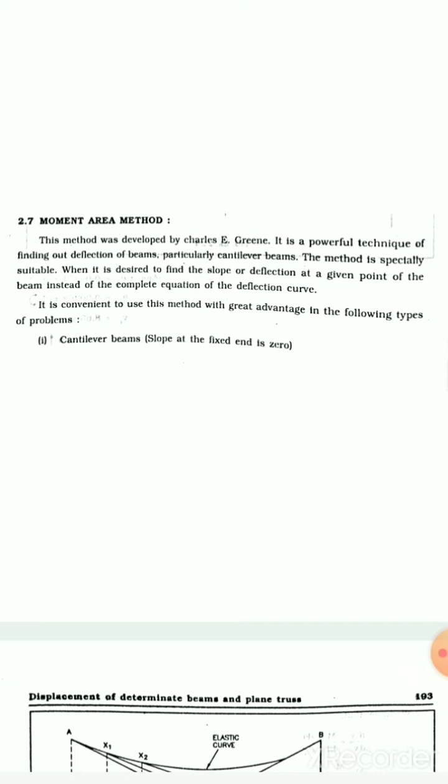Hello everyone. In our Structural Analysis 1 course, today we are going to see our next important topic: the moment area method. In a previous video, we saw Macaulay's method.

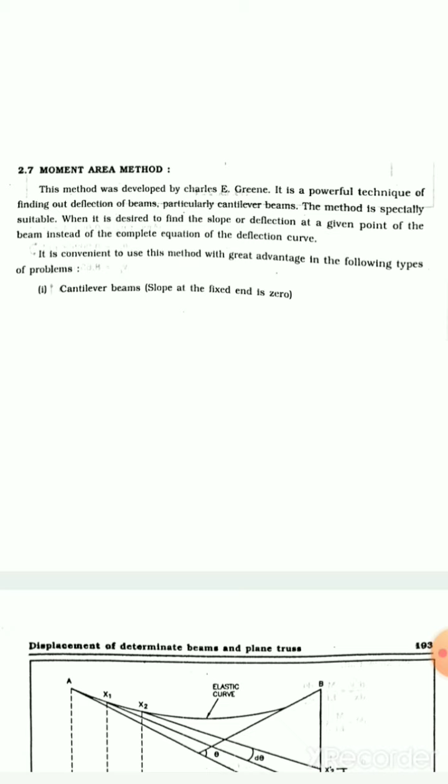First of all, what is a cantilever beam? One end fixed and another is free - it is called a cantilever beam.

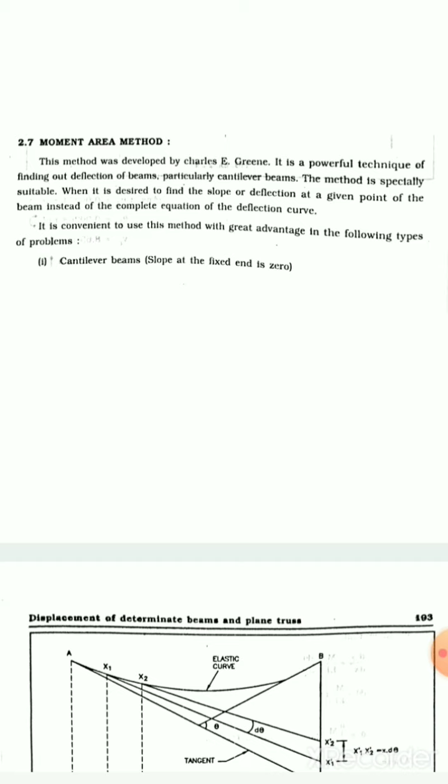The method is specially suitable when it is desired to find the slope or deflection at a given point of the beam, instead of a complete equation of the deflection curve.

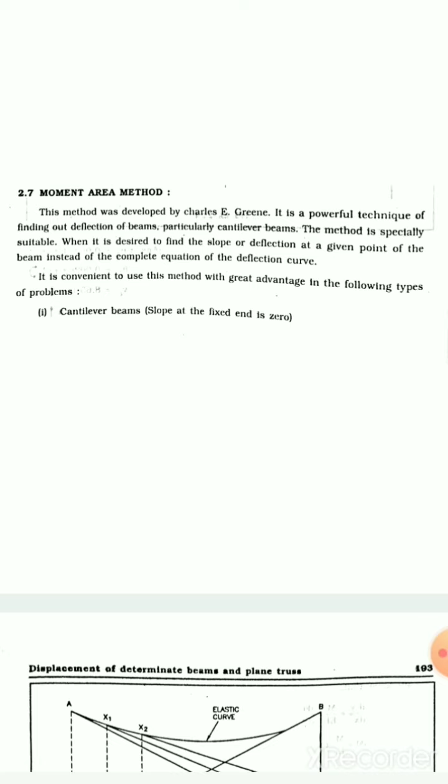So it is convenient to use this method with a great advantage in the following types of problems. Why is this method useful, what is its advantage?

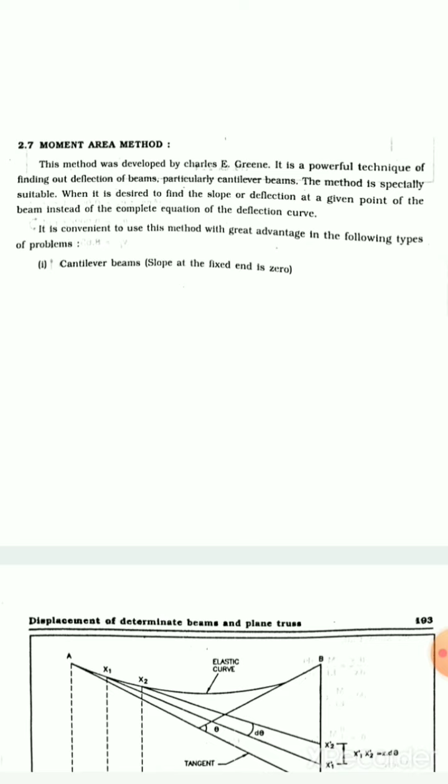The first case: for a cantilever beam, slope at the fixed end is 0.

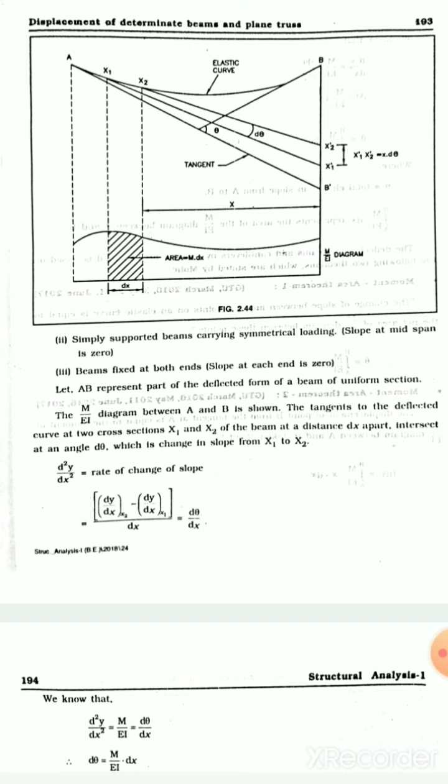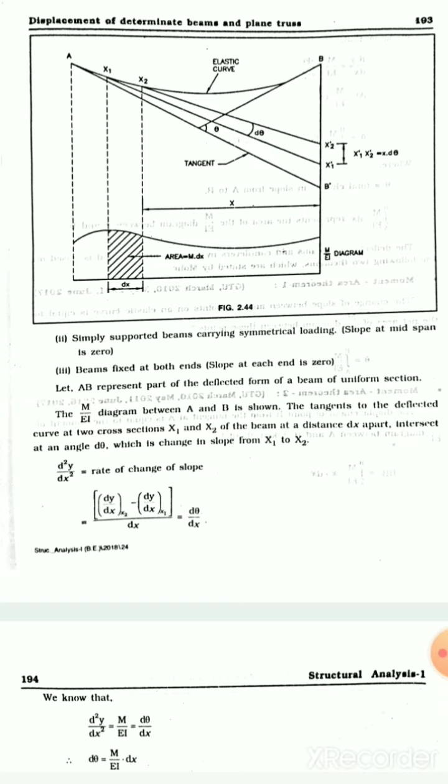The M by EI diagram between A and B is shown.

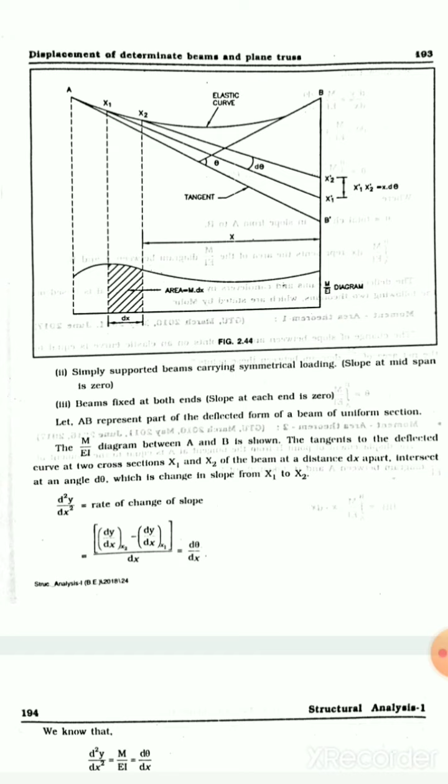The tangent to the deflected curve at two cross sections x1 and x2 of the beam, at a distance dx apart, intersect at an angle d-theta, which is the change in slope from x1 to x2. The tangent forms at the deflected curve. At the deflected part, two cross sections are generated, x1 and x2, of the beam at distance dx apart, intersecting at angle d-theta - this is the change in slope from x1 to x2.

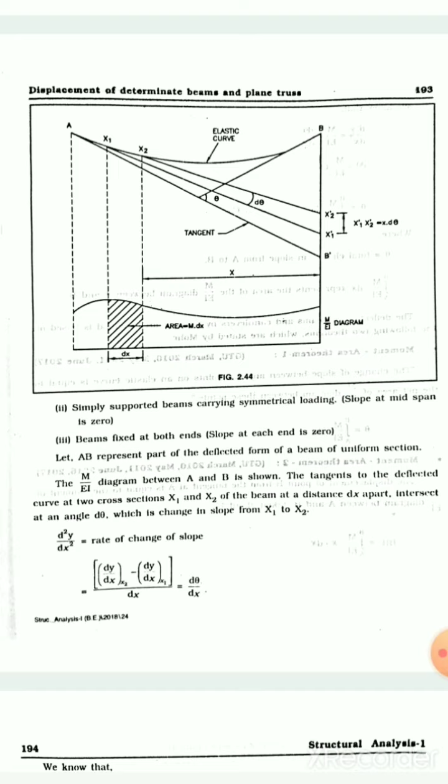So d-square y by dx-square is equal to the rate of change of slope: dy/dx at x2 minus dy/dx at x1, upon dx, is equal to d-theta by dx.

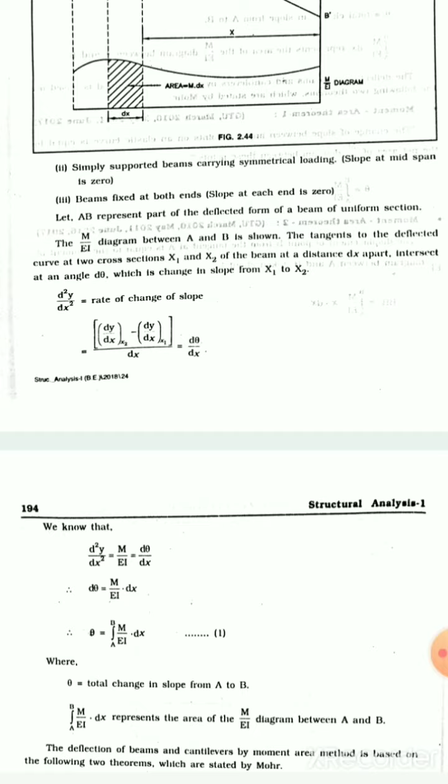So we know that d-square y by dx-square equals M by EI equals d-theta by dx. So d-theta becomes M by EI into dx.

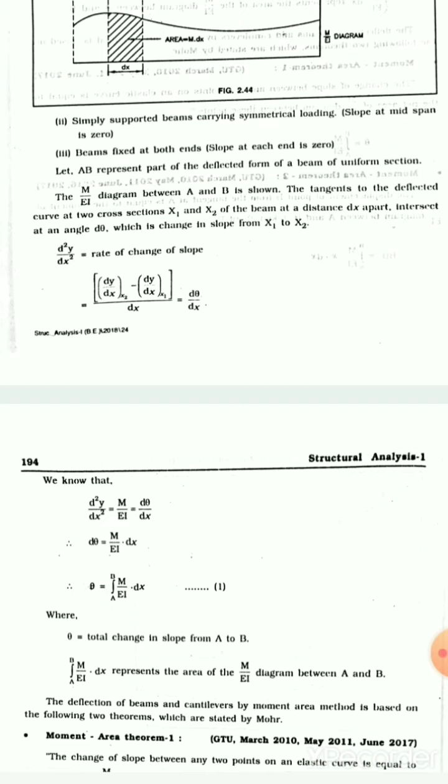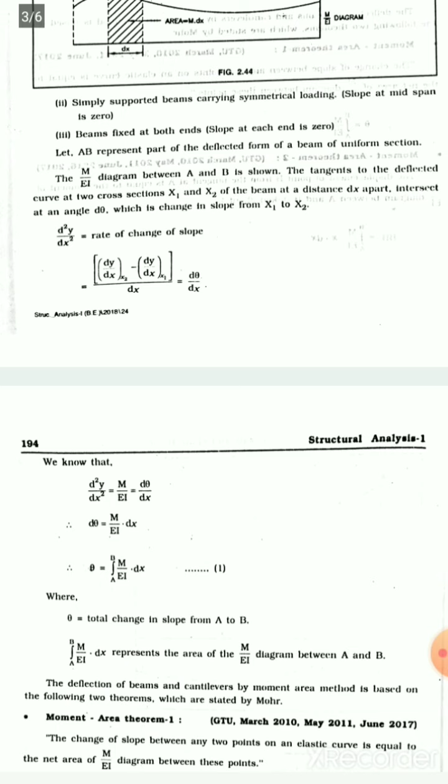Integrating it, theta becomes the integration from A to B of M upon EI into dx, where theta is equal to the total change in slope from A to B. The integration from A to B of M upon EI dx represents the area of the M upon EI diagram between A and B.

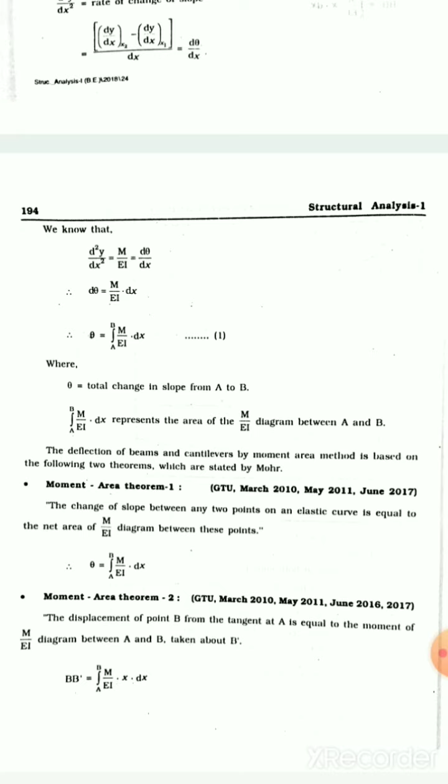So the deflection of beams and cantilevers by the moment area method is based on the following two theorems, which are stated by Mohr.

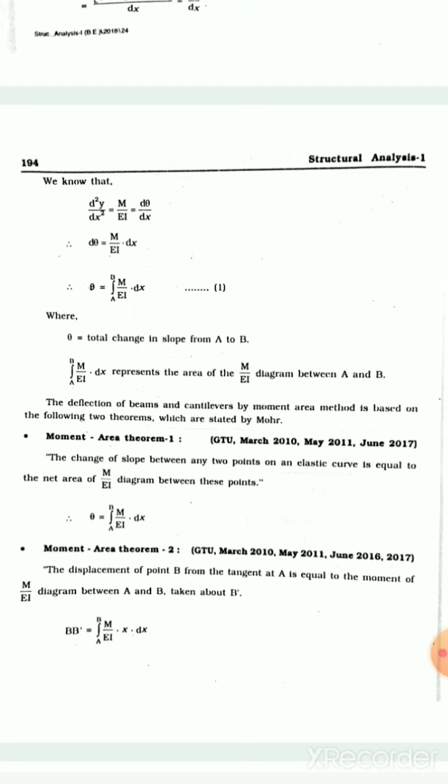Moment area theorem: the change of slope between two points on an elastic curve is equal to the net area of the M/EI diagram between these points. So theta equals integration from a to b of M/EI into dx.

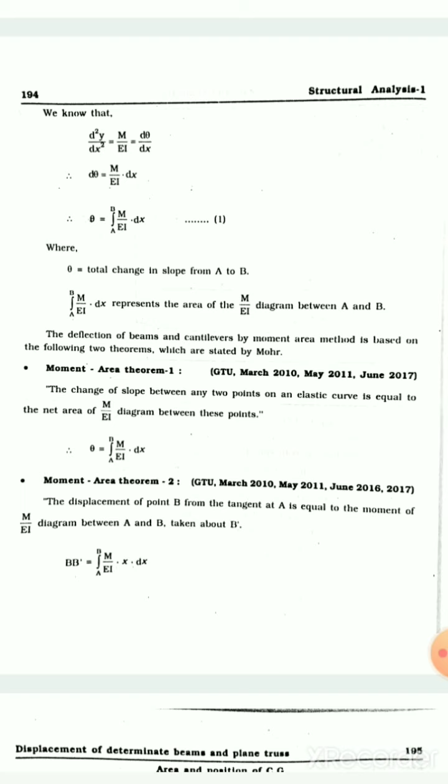Moment area theorem second: the displacement of point B from the tangent at A is equal to the moment of the M/EI diagram between A and B taken about B dash. So BB dash equals integration from a to b of M/EI into x into dx.

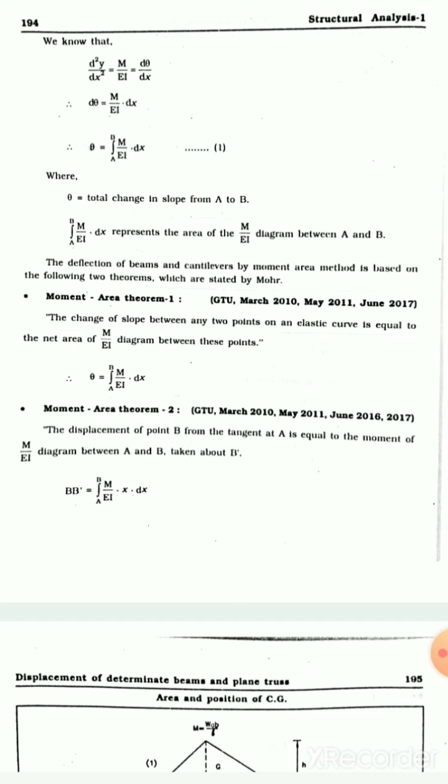Now area and position of center of gravity. Here a triangle is given, so area equals 1/2 L into H. CG is located at a distance of L plus A by 3 and L plus B by 3.

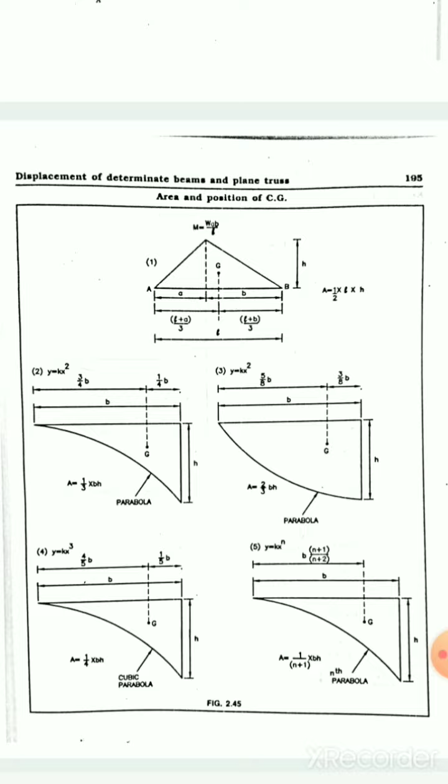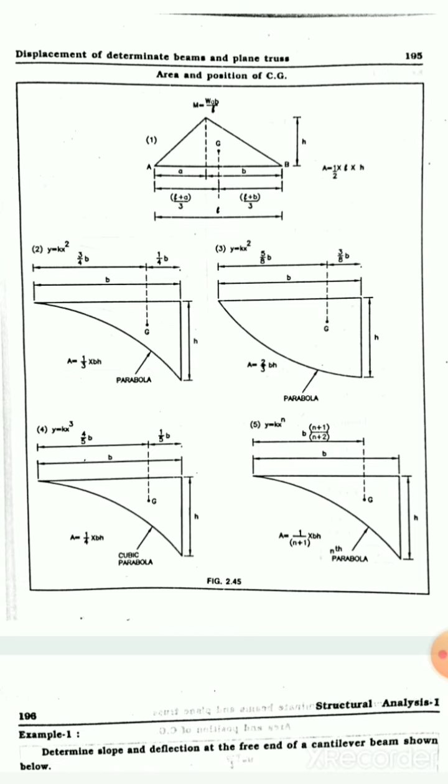Total distance is L. For a parabola, area is 1/3 B into H. For the second figure, it is 2/3 B into H. Then for a cubic parabola, area equals 1/4 BH, and the CG is located at a distance of 4/5 B.

For an nth degree parabola, area equals 1/(n+1) into BH. It is called the nth parabola.

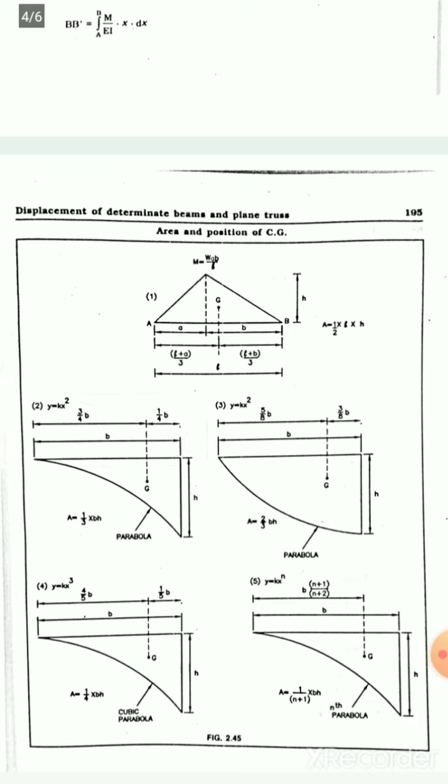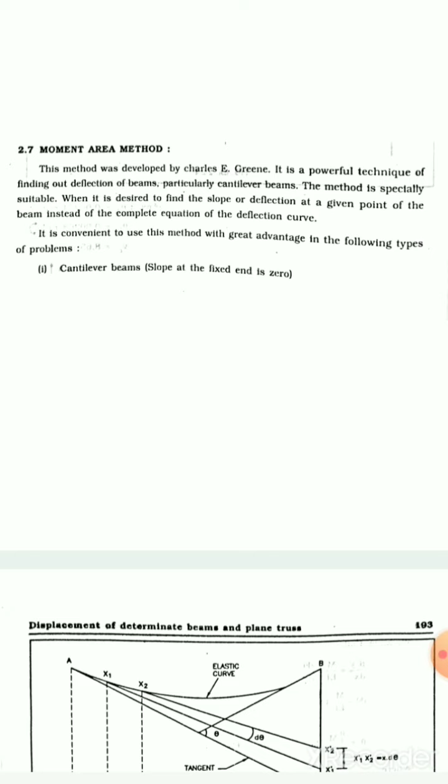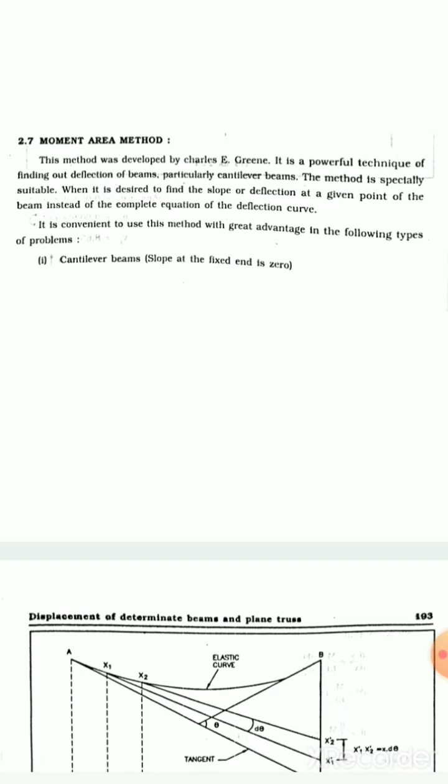This is one of the most important theories, the moment area method. This method was developed by Charles E. Greene. It is a powerful technique of finding out deflection of beams, particularly cantilever beams. The method is especially suitable when it is desired to find the slope or deflection at a given point of the beam, instead of the complete equation of the deflection curve.

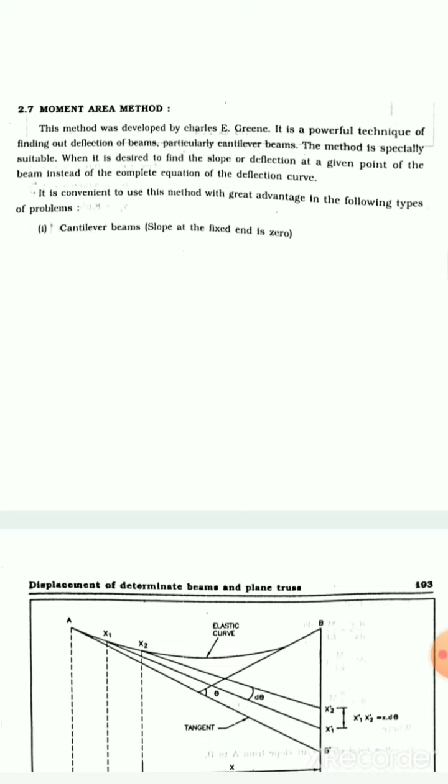It is convenient to use this method with great advantage in the following types of problems: cantilever beams, where the slope at the fixed end is 0.

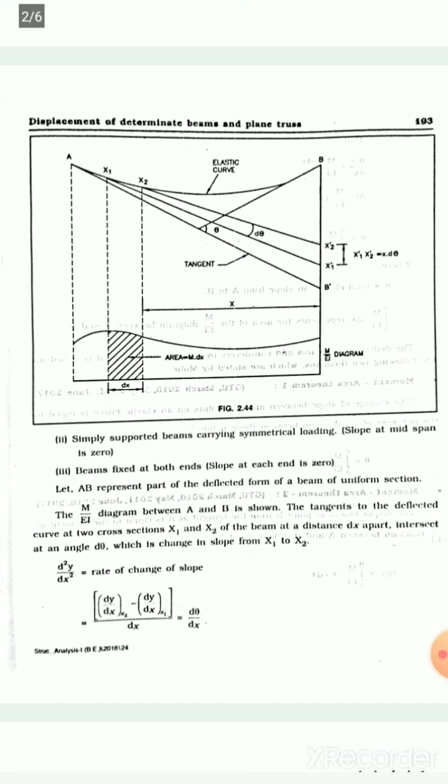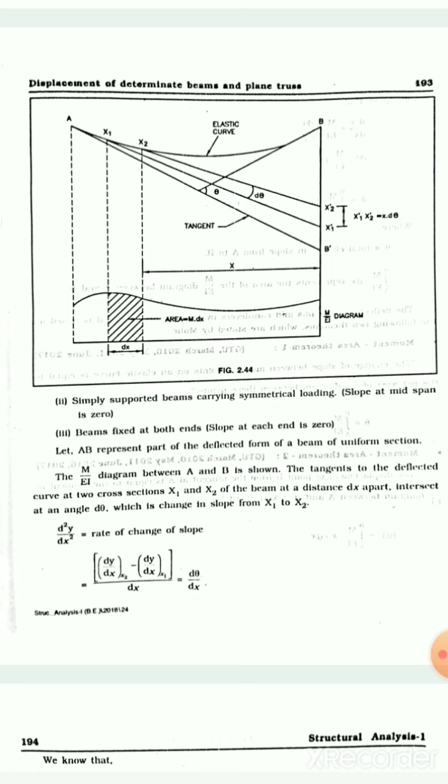Simply supported beam carrying symmetrical loading: the slope at midspan is 0.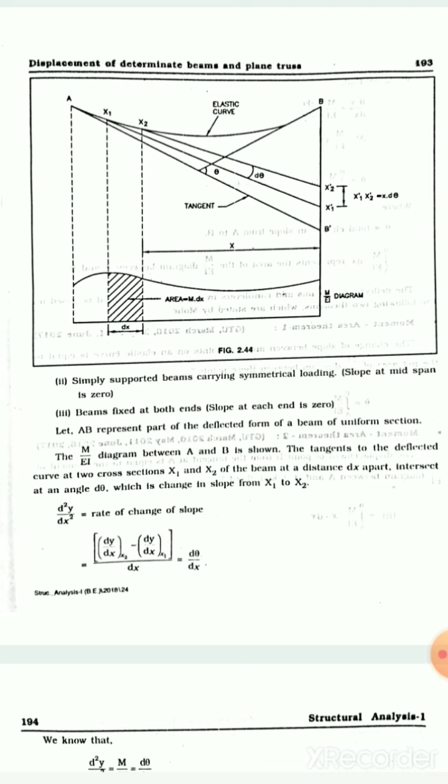Beams fixed at both ends: the slope at each end is 0. So theta equals integration from a to b of M/EI into dx.

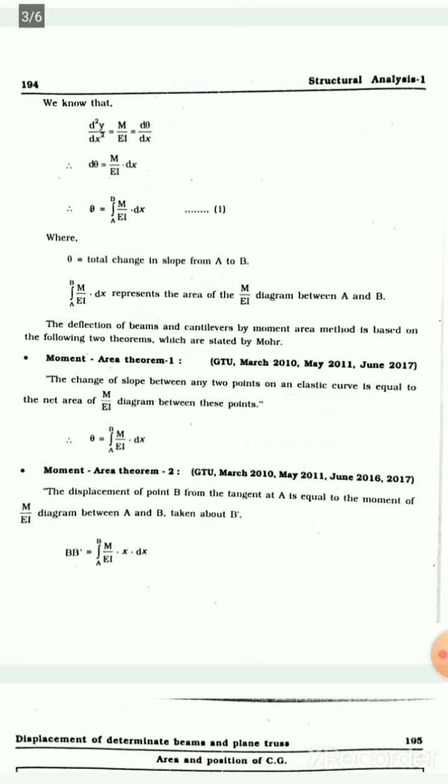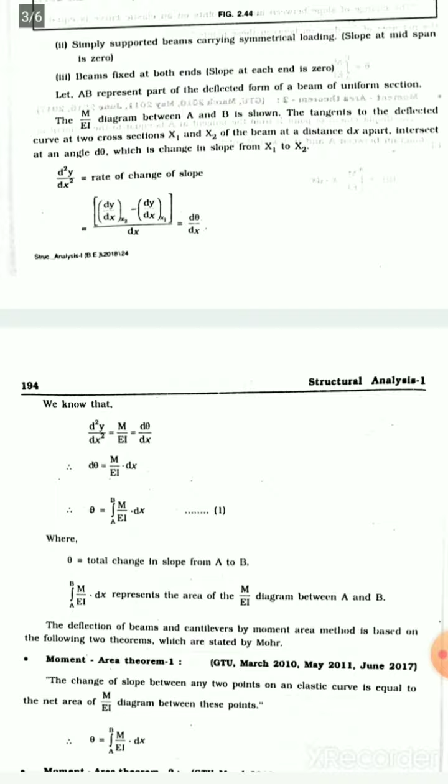Now here is example 1 about the moment area method. A cantilever beam AB is given, with a 30 kN point load acting at the free end. Determine the slope and deflection at the free end of the cantilever beam shown below. Moment of inertia about the x-axis, Ixx, equals 6 into 10^7 mm^4. Young's modulus E equals 2 into 10^5 Newton per mm square.

For a cantilever beam, moment at point B, MB, is equal to 0 because of the free end. Moment at point A is force multiplied by distance in the anti-clockwise direction, so minus 30 into 2, which is minus 60 kilonewton-meter.

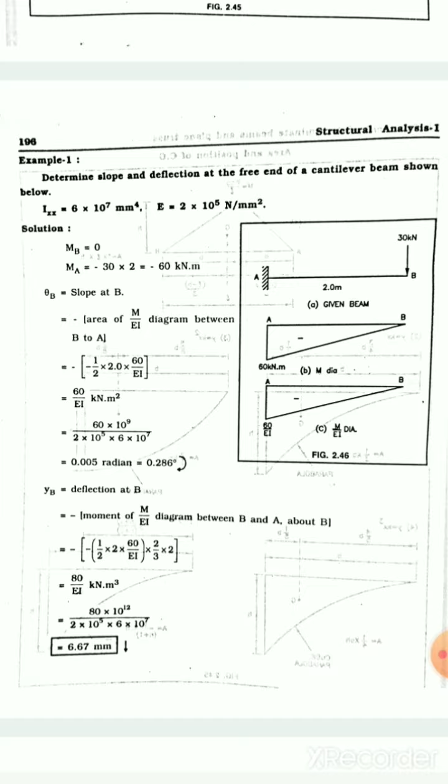Now theta B, the slope at B, is equal to minus the area of the M/EI diagram between B and A. It is a triangle, so 1/2 base into height: minus 1/2 into 2 into 60, with M equal to 60, divided by EI, giving 60/EI kilonewton meter square.

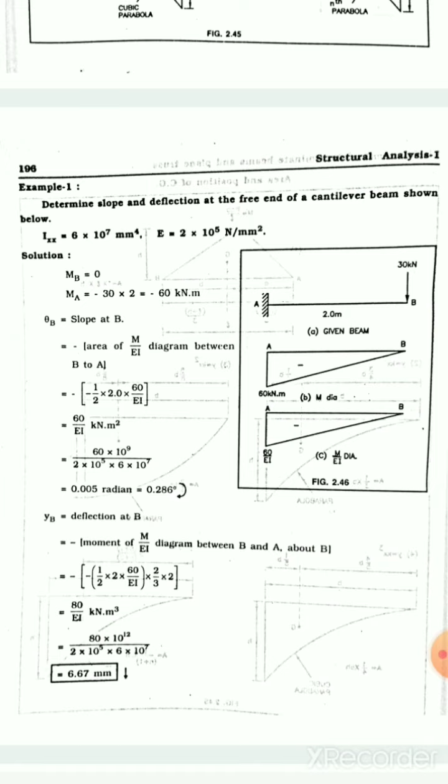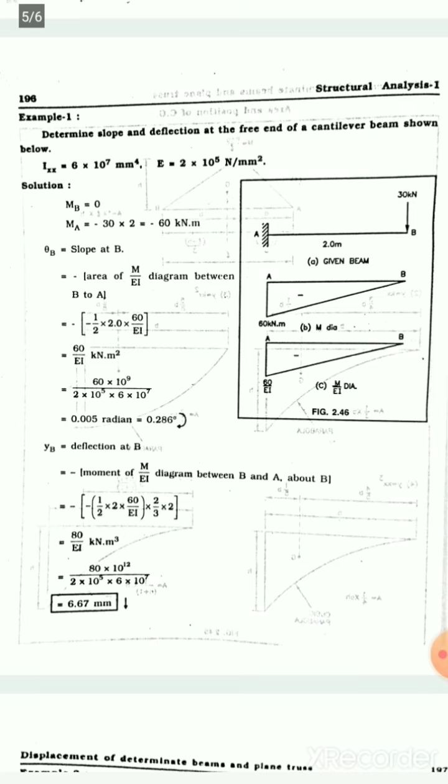Now we put the values for I and E. Ixx, moment of inertia, equals 6 into 10^7 mm^4, and E equals 2 into 10^5 Newton per mm square. So 60 into 10^9 divided by (2 into 10^5 into 6 into 10^7) gives 0.005 radian, which is 0.286 degree.

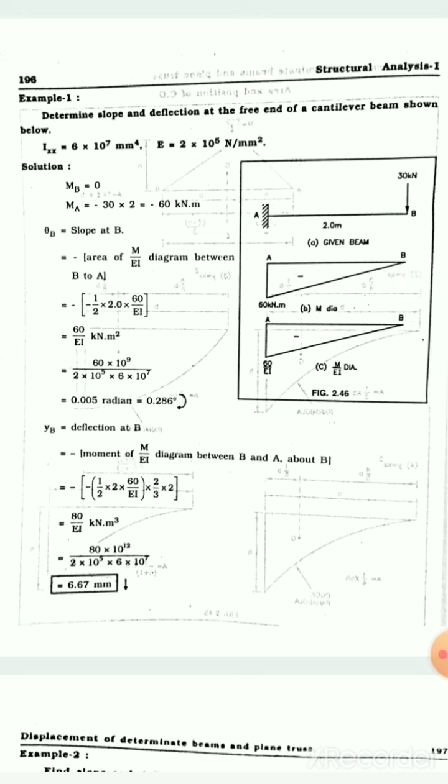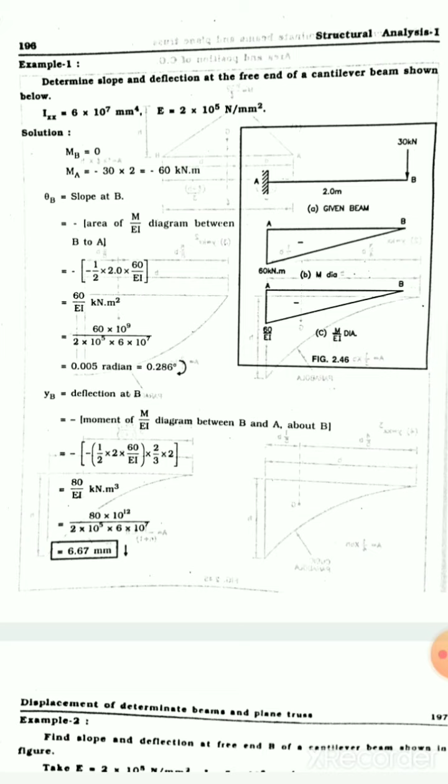Now YB, deflection at B: it is minus the moment of the M/EI diagram between B and A taken about B, so minus 1/2 into 2 into 60 upon EI into 2/3 into 2, giving 80/EI kilonewton meter cube.

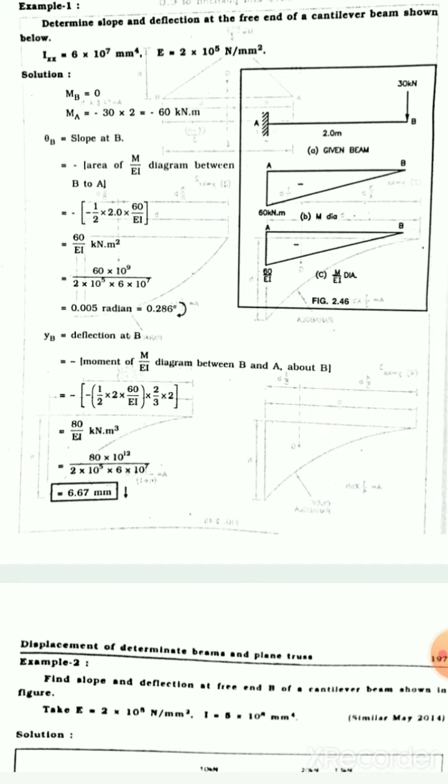Putting the values of E and I: 80 into 10^12 divided by (2 into 10^5 into 6 into 10^7) gives 6.67 mm.